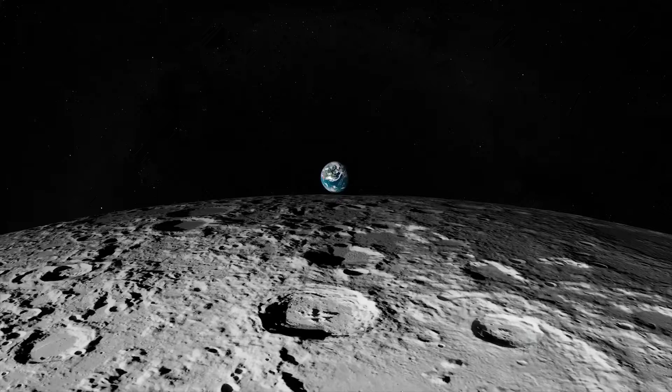Earth, God's greatest gift to the living and mankind. Beautiful life forms live in harmony with perfect balance. Then, after billions of years, comes greed and selfishness, creating chaos and catastrophe.

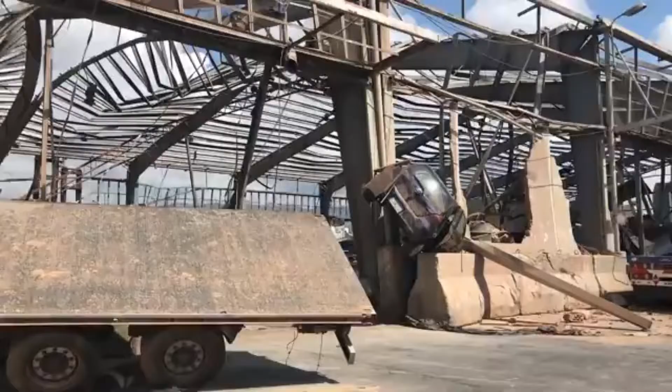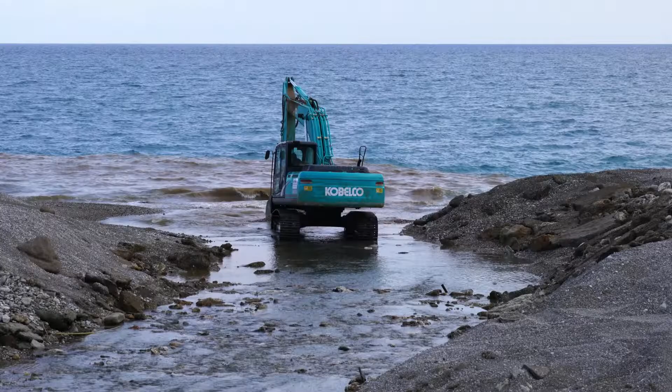After multiple signs and warnings from Mother Nature, only then we come to a consensus to try and fix the damages done. Recently, the United Nations has come with 17 Sustainable Development Goals in achieving a better and sustainable future. The main scope is on the environmental aspect in development.

For the construction industry, there is a practice called Environmental Management System. 20 Fenchurch Street with excellent BREEAM rating.

An environmental management system is a set of processes or practices that enable an organization to reduce its overall environmental impacts whilst increasing its operating efficiency. It is a framework that enables a company to achieve its environmental goals through a consistent approach. The application of the environmental management system benefits companies in terms of assisting staff in understanding their environmental responsibilities and ascertaining that all operations have the smallest possible impact.

Plus, environmental performance is measured against a set of goals that assist in the identification of potential for waste reduction and other cost-cutting strategies. Our focus today is to highlight the impacts of good and poor implementation of EMS in construction projects, specifically in 20 Fenchurch Street, London, as the case study.

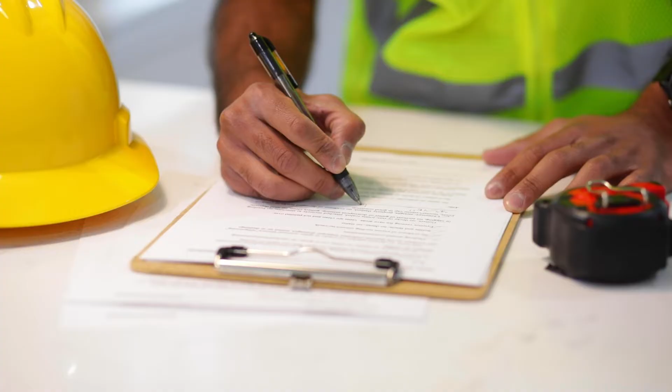What is Environmental Management System? Environmental Management Systems, EMS, are designed to coordinate and optimize operational environmental protection in a company. Companies can have their systems certified according to Eco-Management and Audit Scheme, EMAS, or ISO 14001 Environmental Management Systems requirements with guidance for application. According to the guideline, the systems are designed for each company individually and adapted to its needs, including the Plan Do Check Act scheme.

Multiple guidelines and accreditation have been created in rating and certifying green building design for construction projects, namely LEED, Passivhaus and WELL. For today's video, we are going to focus on Building Research Establishment Environmental Assessment Methodology, also known as BREEAM, the world's leading sustainability assessment method through the quantitative method, developed by Building Research Establishment, BRE.

We can expect the following outcomes if EMS is carefully introduced in a particular project or company, as it is not limited to a reduction in overall environmental impacts. Financially, waste reduction leads to cost savings and higher earnings. Productivity, process control is improved, waste is reduced, and raw materials and consumables are used less. It also improved products and sales as a result of promoting greener credentials. In terms of public relations, it improved public perception, and lastly, for legal, it helps in ensuring both environmental risk management and legal compliance.

Most companies apply a similar method. The general ways of implementation are as follows. A thorough examination of the company's operations, goods, systems, processes, and services, as well as their potential environmental impact. The creation of a policy on the environment leads to the development of an environmental impact reduction scheme, thus helping the employees to have clear jobs and duties.

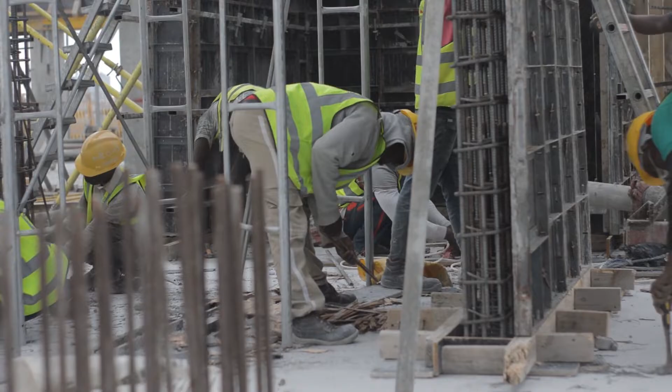40% of annual global carbon dioxide emissions are generated by the building sector. 28% of it comes from building operations, while the balance 11% comes from building materials and construction. This warning is alarming, making green building development and environmental impact assessment some of the best methods to reduce the worsening problem under the environmental management system.

Thus, in 1990, the world's first environmental assessment method was established to achieve optimum performance of construction projects towards the impact on the environment, called BREEAM. BREEAM is a set of standards and a certification scheme that measure and certify sustainable value in the built environment and construction. Achieving a standard involves meeting a set of, in many cases, very detailed criteria.

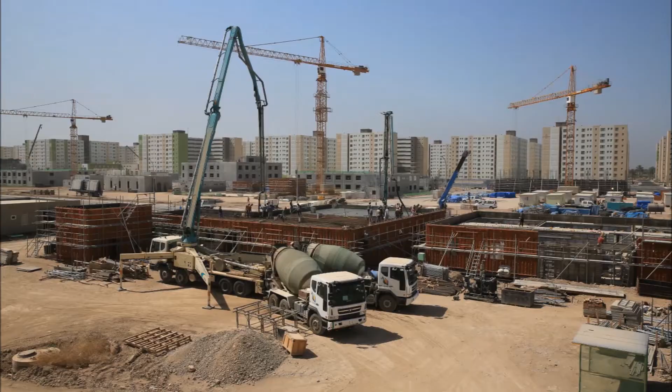Concrete principles are underpinning this set of standards. The BREEAM certification covers a wide range of building types, from commercial buildings like office and industrial buildings to public buildings like healthcare and even prison. In the UK, even though it is not a mandatory requirement for each building to be assessed, most public-funded projects require the building to be assessed and score the minimum rating in BREEAM.

The main principles for BREEAM are: it delivers a sustainable solution and provides a framework to get the balance right. Furthermore, it is based on sound and logical science. In addition, BREEAM supports a process of change. Last but not least, this set of standards ultimately delivers value to the occupants of the building and structure.

In today's video, we are going in depth into the first principle: sustainable solution. Sustainable development can be interpreted as anything that can last long while still being beneficial in the future. We always thought sustainability must be environmental-related, but no, it ranges from environmental, social and economic as well. Sustainable development must cover all three in order to gain the sustainable title.

There is a wide spectrum under the environmental scope ranging from energy and water use, health, pollution, transportation, materials, waste, ecology and management process. These different categories have their credit value and weightage, which will be calculated thoroughly before any certification is awarded. At the end of the assessment, the project will be awarded one of the following: outstanding, excellent, very good, good, pass, or unclassified.

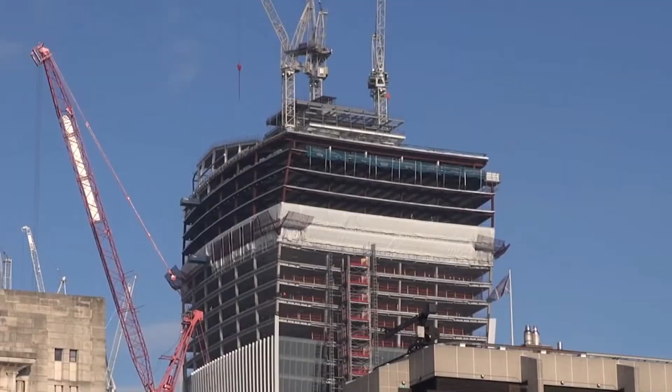A commercial skyscraper, designed by Rafael Viñoly, was built in the middle of London City, the home ground for Chelsea, 2021 champion of UEFA's Champions League. The building construction was completed in 2014 after a 5-year construction period starting from January 2009.

There is a 3-story sky garden on the top floor of the building that was opened to the public in January 2015. With its distinctive design resembling a radio handset device, this building is nicknamed the Walkie-Talkie of London. The structure was intentionally designed and built in a concave figure with larger top floors to maximize the floor space towards the top of the building.

With the smallest floor of 1,900 square meters on level 3, and the largest floor area of 3,300 square meters on level 34, creating an increase of around 73%. In comparison, this building achieves an extra 40% floor area compared to conventional buildings of the same height.

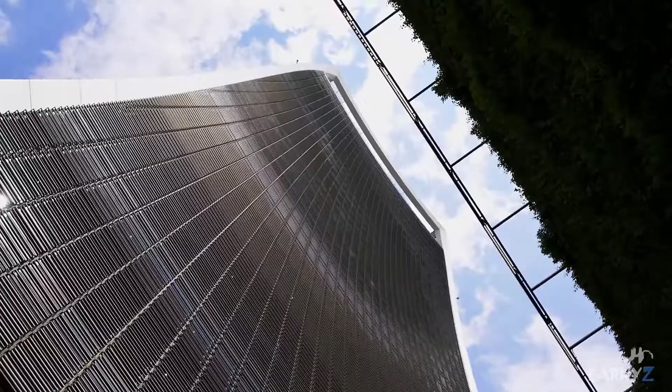The structure was originally owned by Canary Wharf Group and Land Securities, which was then acquired by a Hong Kong investment firm, Lee Kum Kee, in July 2017, for £1.28 billion, profiting 167% from its initial development cost. This single transaction broke the record price for a single asset in the United Kingdom, surpassing the £1.1 billion HSBC Tower located in the same city.

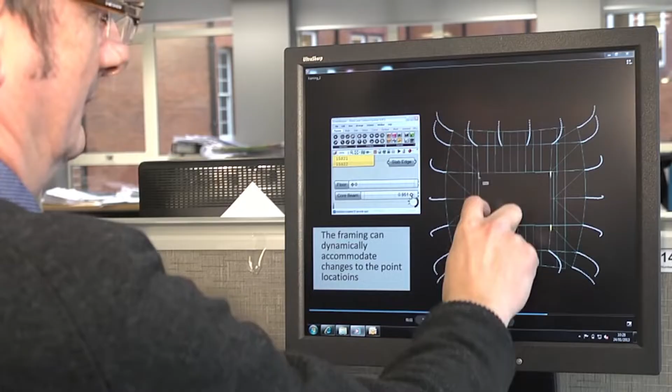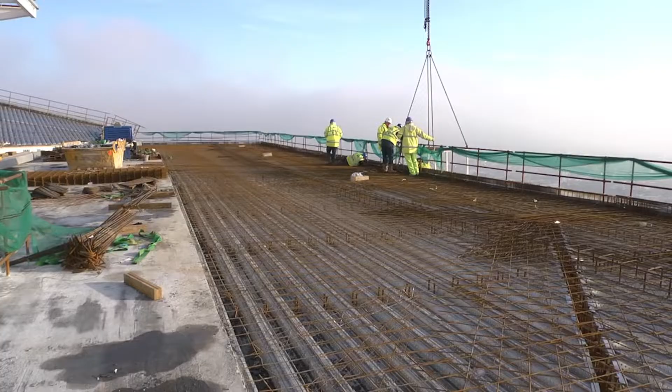A range of elements is evaluated by BREEAM comprising energy and water use, health, pollution, transportation, materials, waste, ecology and management process, as mentioned earlier. The evaluation for this project started from the design to construction and operational stage, with the deployment of licensed assessors to measure and assess all of the processes involved, backed with evidence, in collaboration with the design team. In the end, the Walkie-Talkie of London received an 80.2% final score, an excellent score for the BREEAM rating.

The manager of group sustainability at Canary Wharf Contractors, Martin Getting, said, 'Our total project approach to making sustainability real has resulted in one of the most sustainable buildings of its type in central London.'

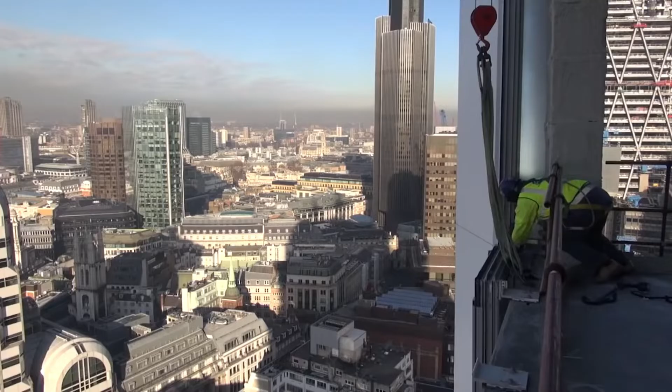The question is, how? There are many measures taken to achieve the greenest building in London City. It all started at the design phase way before the construction stage. Detailed planning was carefully executed by the team before constructing the building. Several key elements are to be highlighted today that aided the project in being certified excellent.

Ecology: a triple-tiered botanical area, the Sky Garden, is located on the top 3 stories of the building, featuring a restaurant and viewing deck that offers a 360-degree panoramic experience of the city. This sky green platform is also said to be the reason for securing the planning approval.

They also created the UK's largest green infrastructure called the Green Wall, containing more than 50,000 plants of ferns, shrubs and grasses covering a 700 square meter area of the wall. The Biotecture installation on the annex service building opposite the southern entrance provides a livable ecosystem for numerous insects and birds. This living wall feature helps contribute to the BREEAM assessment rating in terms of ecology.

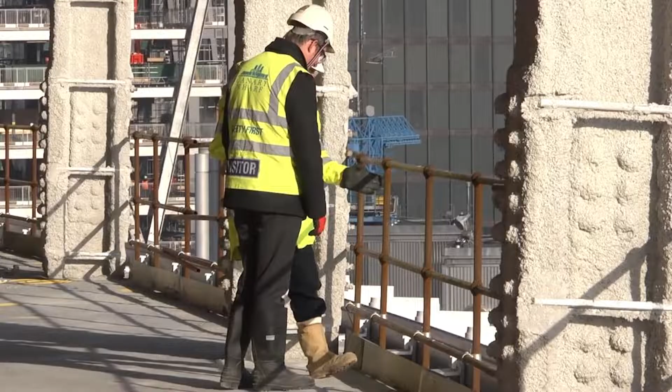Material: cherry-picking the material to be used in the whole project was another practice done in achieving the excellent rating.

Certified sustainable sourced concrete and structural steelwork following the BRE Global Standard BES 6001 for responsible sourcing of construction products. Furthermore, timber with Forest Stewardship Council (FSC) certification comes from responsibly managed forests.

The Walkie-Talkie building makes use of FSC certified timber in most of the structure, covering the shell, core and full fit-out of the Sky Garden and restaurant, usable areas, pocket park, and annex building across 7 levels in total. This initiative makes the project one of only 80 projects globally and 44 in the UK to receive this certification for utilizing FSC certified timber.

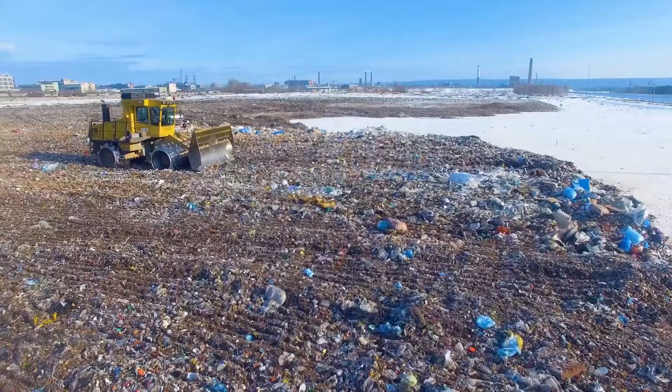Waste. Construction waste is a major problem, as we tend to just leave it in landfills. However, it was a different story for this project. A total of 96.4% of all construction waste was either reused, recycled or recovered, preventing it from being left in an off-site landfill. This was achieved through both on-site and off-site resource management processes during construction.

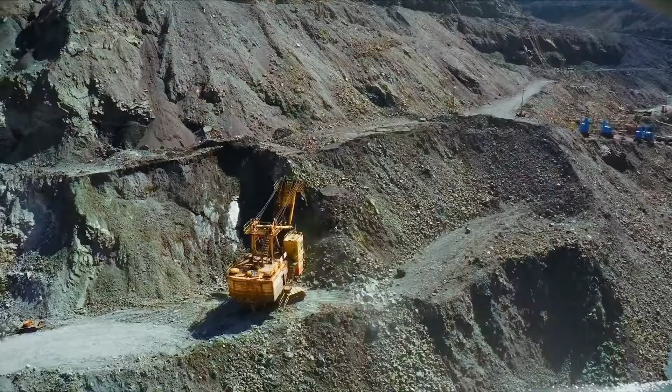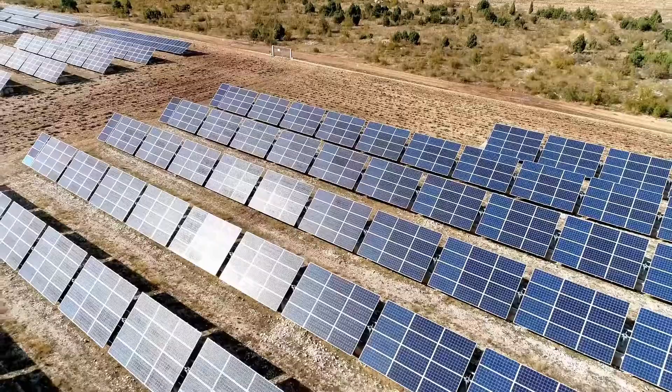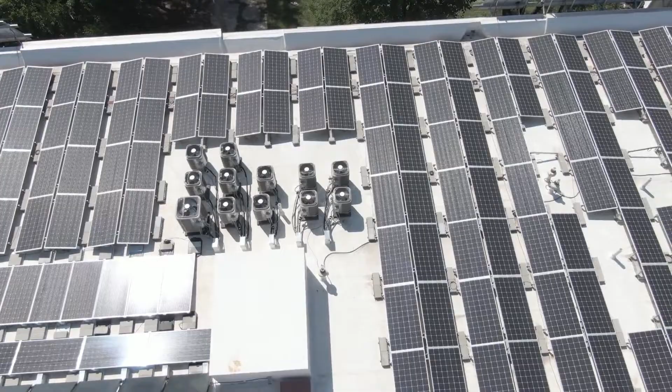Energy. 20 Fenchurch Street employs low-zero carbon technology with solar photovoltaic panels installed on top of the Sky Garden. 250 peak roof-mounted panels generate around 27,300 kilowatt-hours of electricity per annum, saving an estimated 13,260 kilograms of carbon dioxide every year.

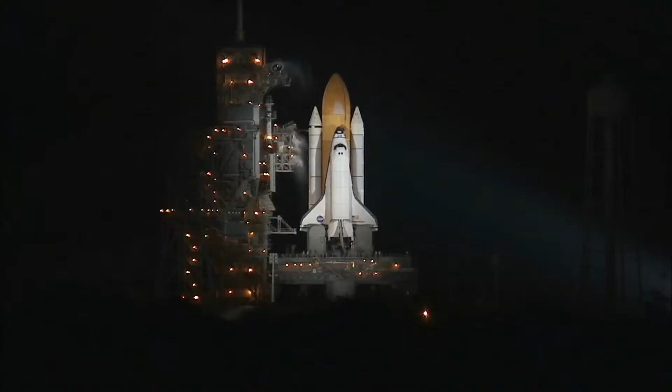Moreover, the main highlight is the hydrogen fuel cell, making it one of the best features for the sustainability of the building. Basically, this building has its own battery that emits low pollutants, creating a greener environment. The technology used in the building's sustainability strategy is similar to the technology developed for Apollo and shuttle space missions.

The fuel cell's main objective is to generate clean power and reduce the building's carbon emissions by 8%, equivalent to 270 metric tons each year. Compared to conventional combustion-based power generation, the fuel cell will prevent a total of 18,000 metric tons of pollutants from escaping into the environment.

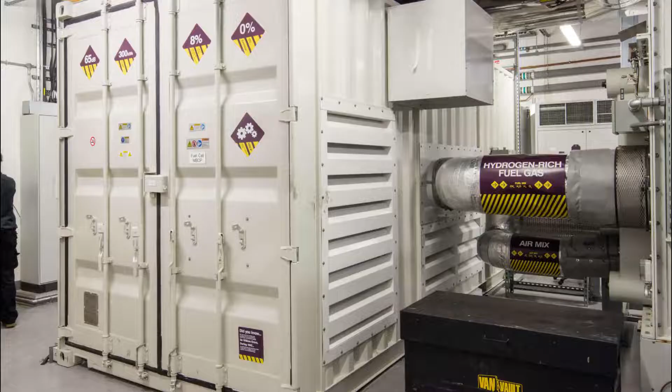The chemical reaction between high-pressure hydrogen-rich gas and clean air generates electricity and heat as a byproduct, which can be used directly as a heater or for cooling purposes.

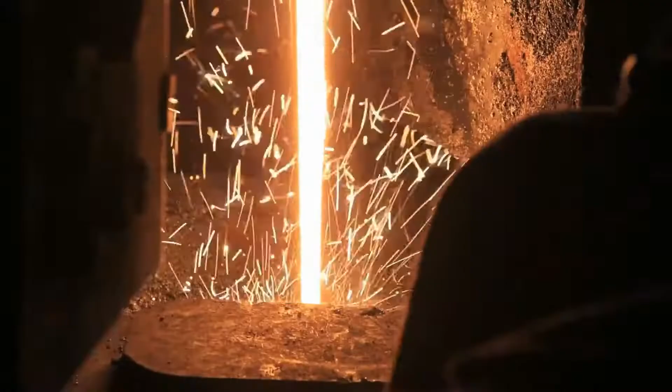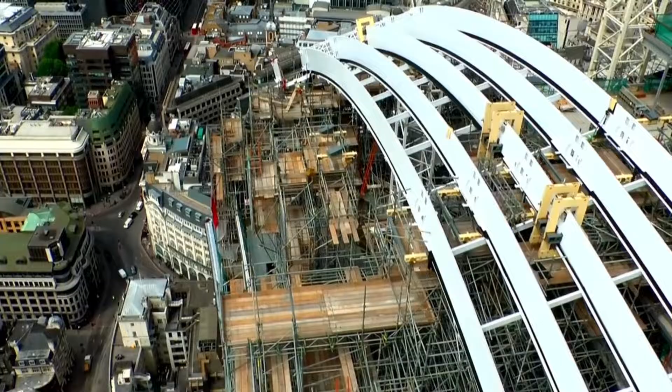The cell creates 300 kilowatts of electrical and thermal output, equal to powering 800 standard-sized households. This implementation is surely a great leap forward to a better sustainable future.

Despite several green approaches made by the project, there are quite a few criticisms of the project as a whole. We will go look at some of them.

Location. The 37-story tower was criticized as a foreign structure in a location where most buildings were heritage buildings. Plus, it is questionable why the building is located outside the designated cluster of high-rise buildings in the City of London. The approval given by the City's chief planner for developing the project was due to the Babylonian Sky Garden structure, making it a public scandal.

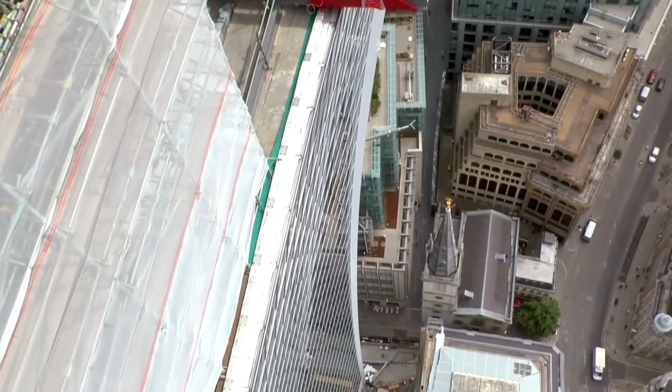Without the greenwashing trump card in the proposal, people suggested there would be no such strangely shaped building developed. Design: the odd design of the building received the 2015 Carbuncle Cup, an architecture prize granted annually by Building Design magazine.

However, this award is a humorous acknowledgement given to the ugliest building in the United Kingdom completed in the last 12 months, contrary to the prestigious Stirling Prize awarded by the Royal Institute of British Architects (RIBA). Certainly, the upper section of the building with bulk-sized top floors makes it more unnatural.

Also, the public expressed that the building gives them eyesores and described the building's shape as more like a sanitary towel or sanitary napkin rather than a walkie-talkie.

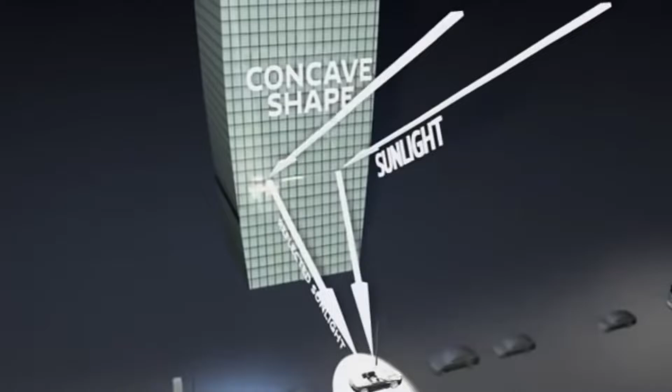Searing ray. In 2013, sensational news was reported during the construction of the tower, making headlines. Due to the curved facade of the building, solar energy was focused directly onto a shallow spot on the street. This unfortunate phenomenon was explained by solar physicist Simon Foster of Imperial College.

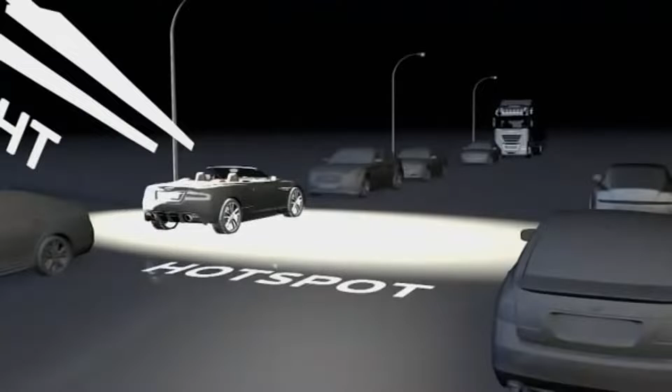Because obviously, I would have thought people would have actually looked at this. This is quite a well-known phenomenon. It's not something that you couldn't really plan for. Having a parabolic or concave dish such as this isn't a new phenomenon.

Though actually I'm surprised no one thought through and actually looked to see if there would be any focal points onto which the sunlight could hit and start burning things.

He also manages to record an astonishing temperature of 92 degrees Celsius, strong enough to pop off tiles, melt the body parts of cars, and smolder carpet on the shops nearby. There is also a video showing a man frying an egg for his meal during the phenomenon.

The architect, Rafael Viñoly, admitted that he knew there would be a problem with the curved facade and the risk of the sunlight beam intensely damaging the neighboring structures. However, he stated that he never thought it would be that hot, as he said there would be climate change that comes into play.

He mentioned that his experience during his first time visiting London was different from the mid-construction of the tower, and directly raised global warming as a major factor.

From the analysis during the phenomenon, the scorching experience would last around 2 hours during lunchtime, the busiest hours in most cities including London. This would surely be an unpleasant experience for pedestrians to be in the bright spot.

What's strange is, in 2010, Rafael Viñoly also received complaints about his building, the Vdara Hotel in Las Vegas. Guests from the hotel expressed dissatisfaction as drink glasses melted and hair burnt, especially when sitting around the pool.

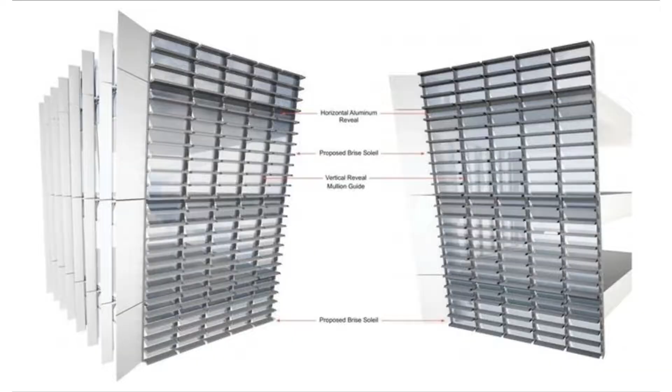In conjunction with the 20 Fenchurch Street's death ray, a permanent solution was then implemented. A sunshade known as Brise Soleil was installed on the south part of the tower, costing another $14 million, which ultimately solved the issue at a quite high price.

Wind tunnel: 2 years after the death ray incident, the 20 Fenchurch Street tower has been accused of creating another problem. The curved facade was reported to create a channel of strong wind enough to knock people down the street. Some Londoners working nearby the tower reported that after completion of the building, they experienced quite a strong wind blowing on the street level.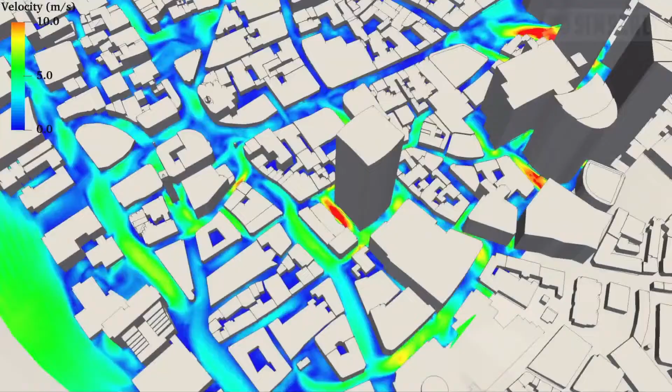It almost caused a food trolley to be blown away, as reported. Thus, the City of London Corporation demanded a new assessment to be made on the wind report, to compare with the one already made and submitted at the planning stage.

The head of design of the London City, Gwyn Richards, stated that the outcome of the assessment shows the wind motion was somewhat different from the initial expected plan during the planning stage, hence proving the issue faced by the locals, which is then known as the downdraft effect.

A strong downward force of the wind occurs when the incoming wind is forced to move downwards after it hits the wall of the building. This accelerated wind affects the comfort of pedestrians around the area.

Even though some troubles occurred, the benefit from the implementation of the green development was apparent. 64% of the building occupancy was already leased out during the construction stage, with 23% waiting for confirmation, leaving another 13% portion available. This data was taken in February 2014, months before the completion of the tower, showing how significant sustainable development is in terms of sales and marketing.

Yes, the environmental aspect is greatly benefited from the development of the project, but it also creates a domino effect on another aspect as well.

Furthermore, the change of ownership highlighted the powerful impact of green investment in a construction project. Roughly 167% profit was gained from the initial development cost, as mentioned earlier.

Kudos to the design team for achieving the excellent rating, and the whole project team for mitigating the problems that arose. However, this project has shown all construction players to be very precise in planning the design of a building. All possible risks must be taken into consideration.

The implementation of the environmental management system has been widely used across the globe, including Malaysia. The awareness of environmental impact can be seen locally with the growing application of Green Building Index (GBI), MyHijau, Malaysia Green Attribute Tracking System (MGATS), Green Real Estate (Green RE), and the launch of the Green Technology Master Plan (GTMP).

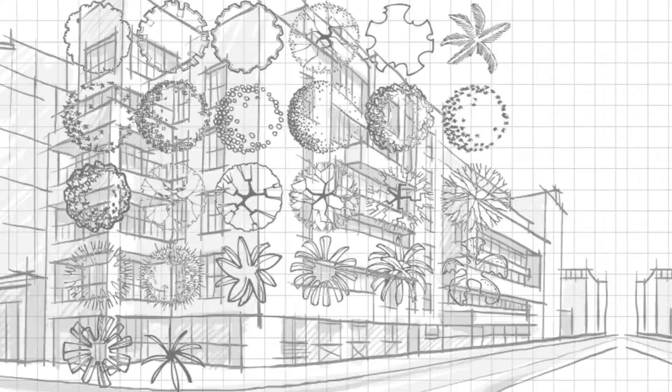Environmental Management System: 20 Fenchurch Street with excellent BREEAM rating.